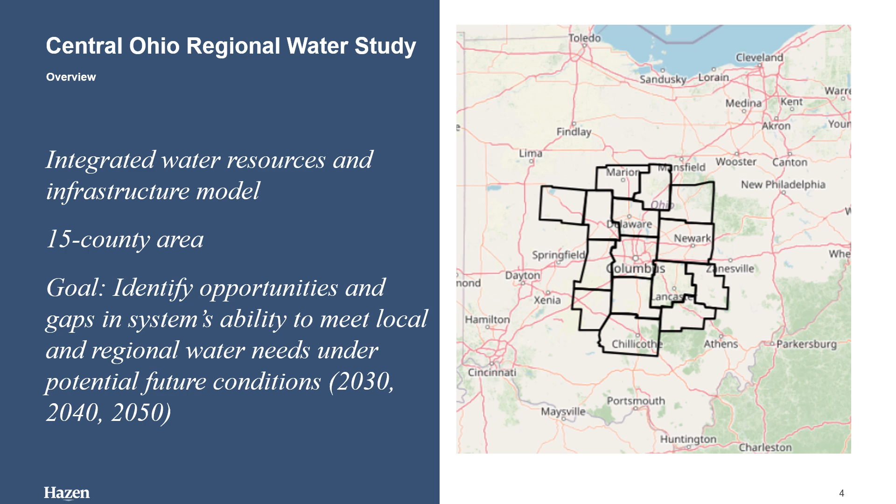Project objectives were identified for the Central Ohio Regional Water Study. The objectives include improve, maintain, and optimize resources while planning for growth.

Results of the model were used to evaluate opportunities to secure safe and reliable water supply for public use, consider reuse water for non-potable needs, and identify areas of capacity limitations. Future solutions were required to maintain beneficial use of water required for recreation, wildlife, and economic growth.

Collaboration and regionalization. The project created a dashboard planning tool that will serve as a focal point for collaboration between utilities and state agencies, helping to ensure best use of both water and financial resources.

Maximize funding impacts through sustainable infrastructure improvements. Using the analytic capabilities in the dashboard, state agencies can now and will in the future be able to help identify funding to build the infrastructure needed to meet the long-term needs for the region and identify future needs.

The project also provides information to the state agencies on how stormwater and surface waters will be impacted by growth and development. The project can be used to identify opportunities to help mitigate impacts of development on the environment.

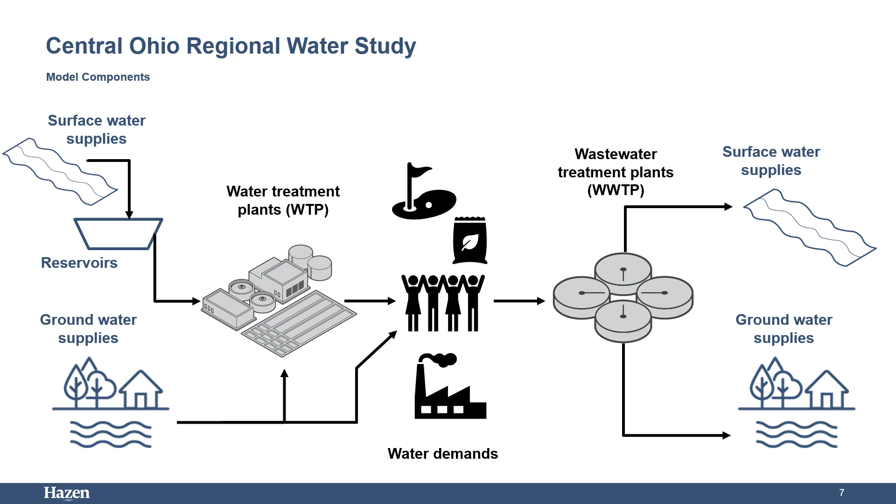Groundwater availability was estimated at the HUC 10 watershed level. HUC stands for Hydrologic Unit Code, and the 10 stands for the number of digits. The U.S. Geological Survey has delineated each of the watersheds in the country and assigned them a specific number based on their location, similar to a zip code.

The system identifies drainage areas into regions, 2 digits, subregions, 4 digits, basins, 6, subbasins, 8, watersheds, which are 10 digits, and subwatersheds, 12 digits.

One daily groundwater availability value was assumed per HUC 10 watershed, and all groundwater users within that HUC 10 were assumed to share that amount of groundwater. Groundwater supplies in Licking County range from 2.5 to 25 million gallons per day for a given HUC 10. Across these watersheds, an estimated total of 59.5 million gallons per day can be sustainably withdrawn from Licking County groundwater sources.

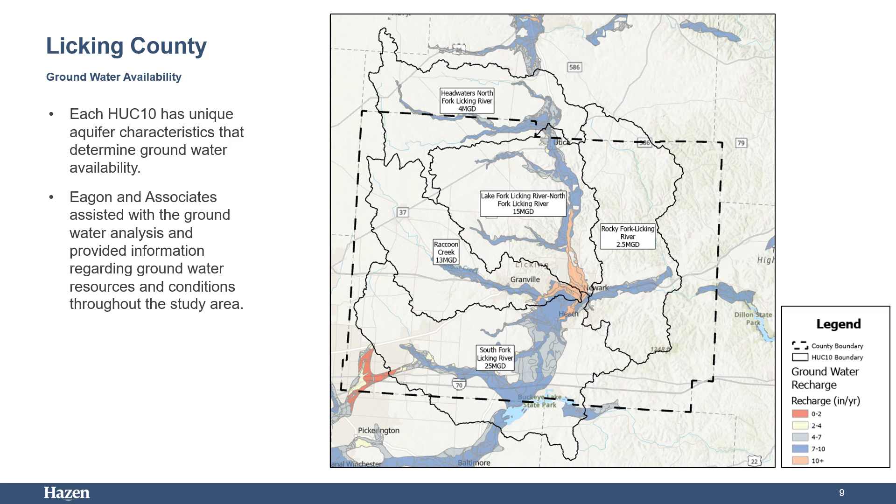Licking County is estimated to have approximately 47.5 million gallons per day of surface water availability. This value is not available at any given stream within the county; however, it corresponds to the most abundant surface water location, on the eastern portion of the county on the Licking River. The western portions of the county have limited surface water availability as they are at the top of the Licking River watershed with less tributary area.

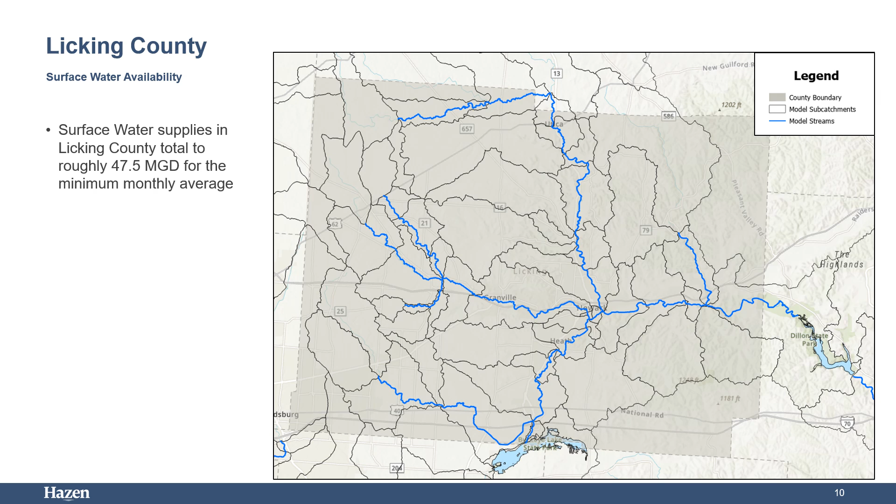It should be noted that the surface water availability estimates are raw runoff estimates. The estimates do not include wastewater flows that are added to the streams. The surface water supply value is the minimum monthly average value for the current condition.

Adding both the groundwater and surface water supplies together, it is estimated that Licking County has roughly 107 million gallons per day of total available raw water supply. This supply availability is nearly split between groundwater and surface water, with slightly more available groundwater.

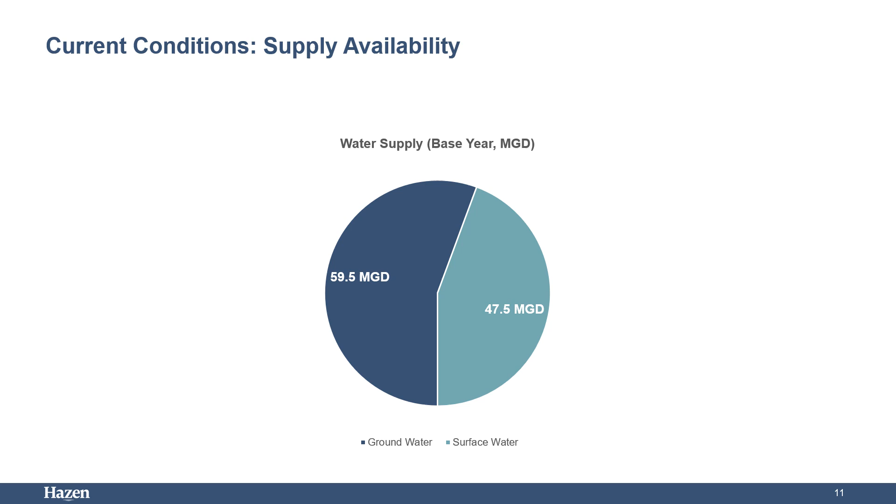Supply availability at the sub-county level varies by location based on aquifer yields and surface water tributary area, as presented on the previous slides. The next focus for this resource evaluation was the existing and future demands that draw raw source water from the available water resources.

Data on water demand was developed using population data, which was available on a regional basis. The information on current county population was obtained from MORPC, the Mid-Ohio Regional Planning Commission. These population data were used to further calculate water demand.

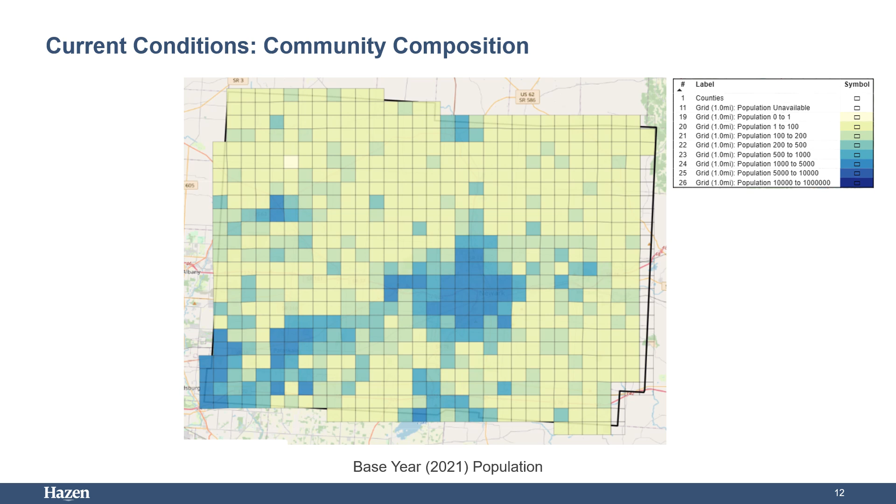Water demands are calculated for each utility using service area boundaries, the population within the service area, and recent historical water production data as reported to the Ohio Environmental Protection Agency.

A per capita water use was calculated for each service area. This was calculated by taking the water production data and dividing by the assumed population within the service area, which resulted in a per capita water use of gallons per person per day.

This per capita water use includes all types of users within the service area, whether it is residential, commercial, or industrial. It is important to note that in future conditions, no service area expansion was assumed, and the water per capita use for each utility was assumed to stay the same. This means that growth in projected population would also mean a proportional growth in commercial and industrial demand within the utility service area boundary.

For future water demands, the per capita water use was multiplied by the assumed future population within a service area.

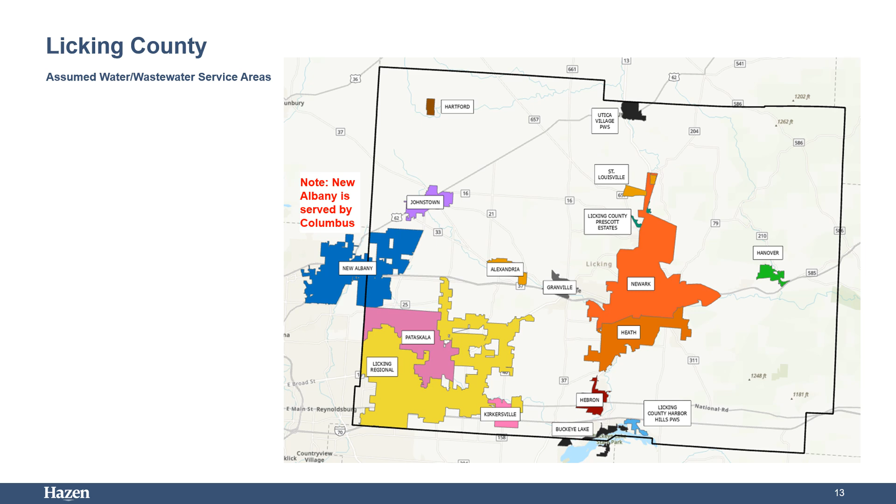The per capita usage assumed for these private water users is 70 gallons per person per day. The total demand estimated from private water systems users is 4.5 million gallons per day. The additional categories shown on the chart represent existing users with water withdrawal permits who report their use annually to the Ohio Department of Natural Resources.

These include residential users such as rural housing developments or mobile home parks, commercial users including retail stores, industrial demands for manufacturing facilities, agriculture draws from large farms, and seasonal users such as golf courses.

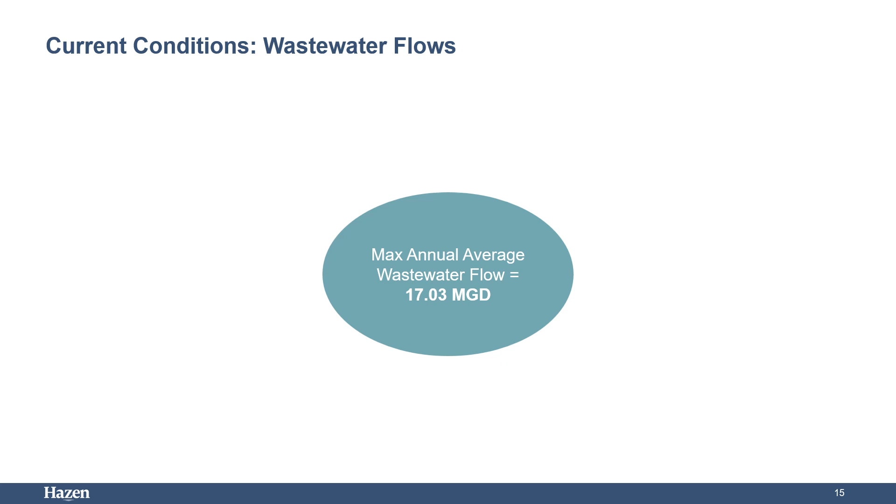This is due to the wet weather impacts observed in wastewater due to the inflow and infiltration impact. During rain conditions, areas with combined sewer systems could see very high flow rates, while during dry times only the base flow is observed. High rainfall in a single month could skew the average. Therefore, an overall annual calculation is used to determine if a particular plant is nearing its permitted treatment capacity limit.

The existing demands and flows can be compared to the existing infrastructure. In Licking County, there are a number of water treatment plant facilities, and their total capacity is just over 30 million gallons per day. Roughly half of that source water is pulled from groundwater, and the other half is pulled from surface water, or the local streams and rivers.

Remember that the total maximum daily water demands are about 22 million gallons per day. So, in the current conditions, the county has sufficient capacity to provide treated water to meet demands.

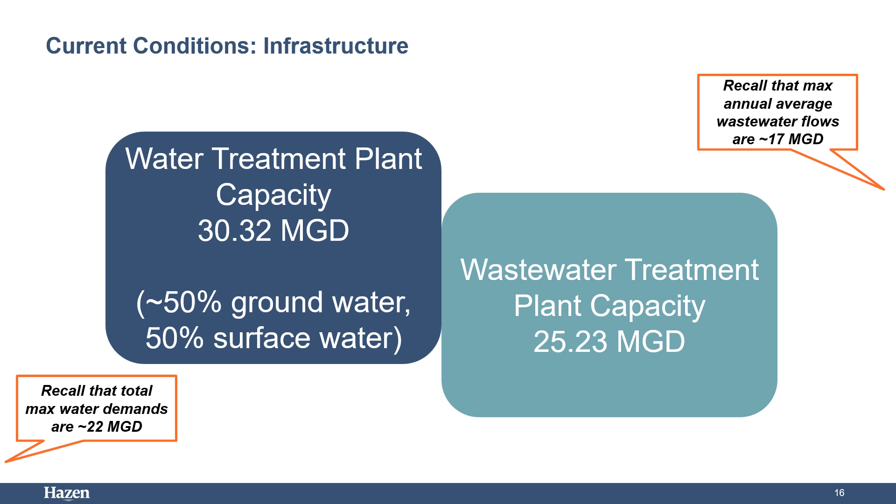From a wastewater treatment plant capacity standpoint, the county has just over 25 million gallons per day of permitted capacity at the existing facilities across the county. The current maximum annual average wastewater flows generated by the demand and inflow and infiltration are about 17 million gallons per day. Again, the existing county infrastructure is sufficient to meet the current wastewater flows.

With an understanding of the current conditions in the county, the next step was to expand the analysis and explore potential future conditions. This study evaluated conditions in 2030, 2040, and 2050.

When analyzing future conditions, current data is projected from the present to the future in time. With that projection comes uncertainty, which is why analyzing multiple potential future scenarios can provide more resiliency and reduce the risk of failure.

Analyzing several scenarios or plausible futures helps ready the region for ending up in future A, B, or C, and knowing the projects to implement all along the way.

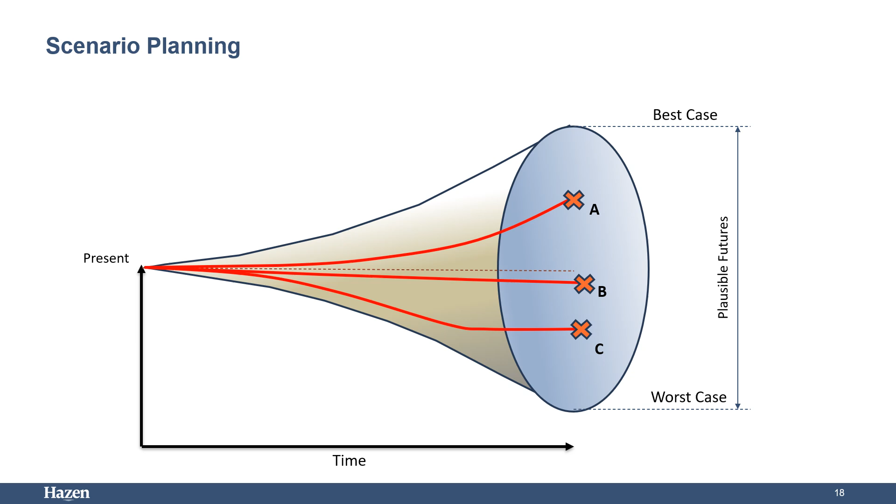4 model scenarios were developed to define the range of potential futures. Scenario conditions that were explored were 2 different precipitation and temperature changes and 2 different population estimates, totaling 4 different model scenarios. The different inputs of these scenarios will be explored further on the following slides.

2 population sources were used for the scenario modeling. The expected growth trend was informed by the Mid-Ohio Regional Planning Commission, or MORPC. The MORPC population projections were informed by local zoning and land use plans. The historical growth trend was informed by the Ohio Department of Development, or ODOD. The ODOD populations are informed by historical birth, death, and migration trends.

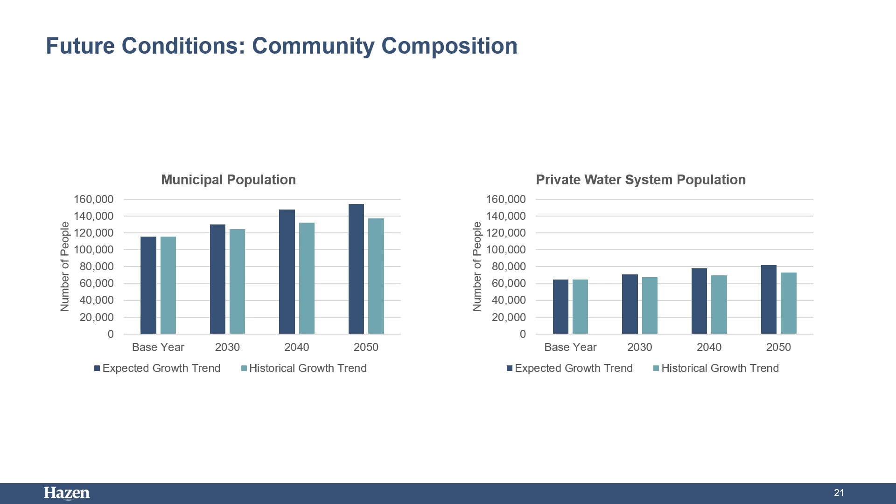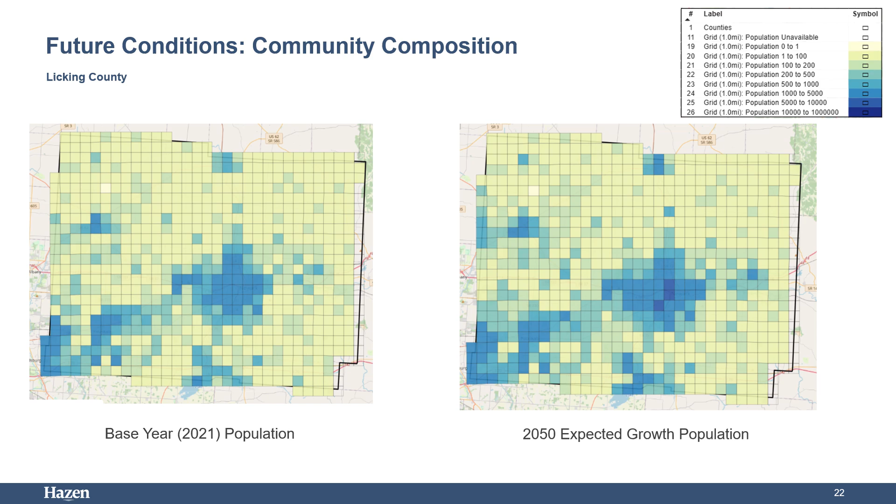Another element of the scenario modeling is the different temperature and precipitation scenarios projected. Historical precipitation and temperature data from 1983 through 2022 were used to estimate surface water runoff and evaporation. For future conditions, change factors were applied to the historical data to analyze the effects on surface water availability.

Temperature and precipitation changes were based on global climate model data downscaled to the Central Ohio area. There are different change factors for each month and future planning year—2030, 2040, and 2050. Change factors were extracted from an ensemble of 49 global climate models from the Intergovernmental Panel on Climate Change.

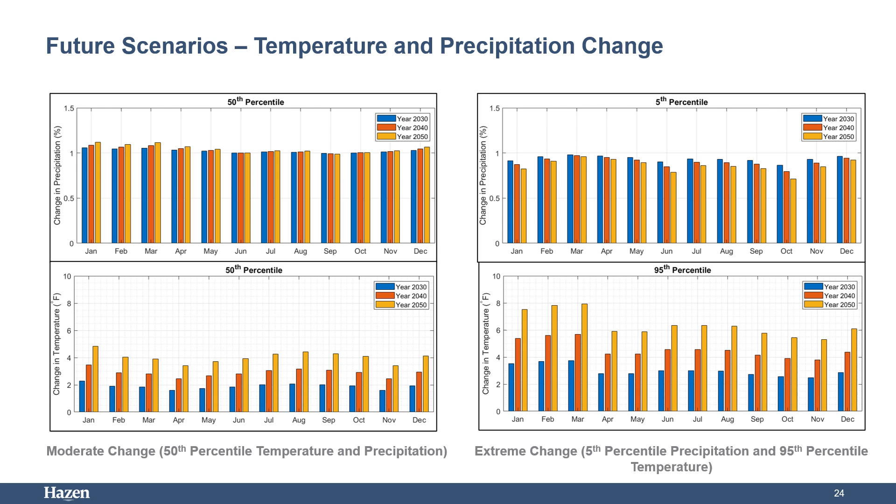The extreme change scenario modeled is the hot and dry scenario, which utilizes the 5th percentile change factor for precipitation and the 95th percentile change factor for temperature. The top right graph shows the 5th percentile change factors for precipitation, and the bottom right graph shows the 95th percentile change factors for temperature. A scenario with no future temperature and precipitation change factors was also evaluated.

The two temperature and precipitation conditions affect the future raw water supply availability, as the two different population estimates affect the future water demands.

These four scenarios allow for planning of what different supply and demand conditions may look like and how those conditions compare to the infrastructure needed.

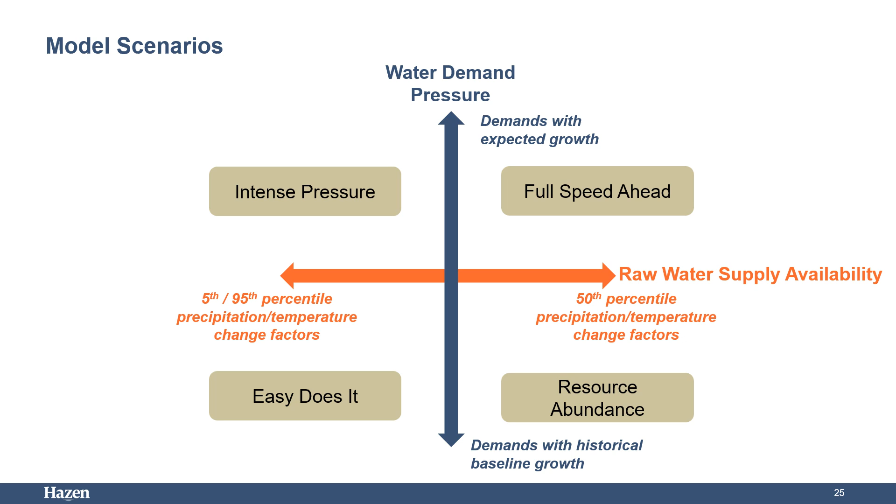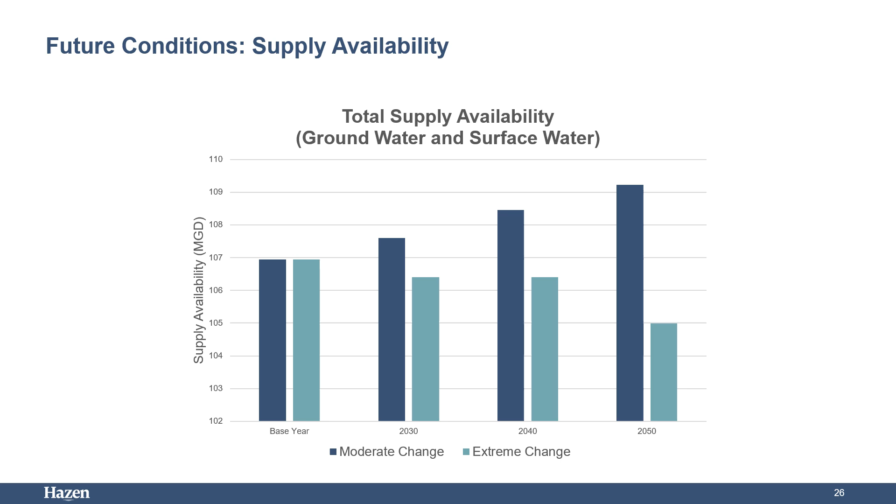The Ohio State University was consulted about assumed increases in future agricultural irrigation water demands. It is estimated that by 2040, agriculture fields will need at least 5 inches of irrigated water during the critical growing season, which occurs between July and September. Based upon this information, the team reviewed future land use to identify where agricultural fields are expected to be in 2040 and 2050, and calculated the water demand needed for 5 inches of irrigation across those agricultural fields. These irrigation demands are present for the 2040 and 2050 condition and are assumed to use groundwater for source water.

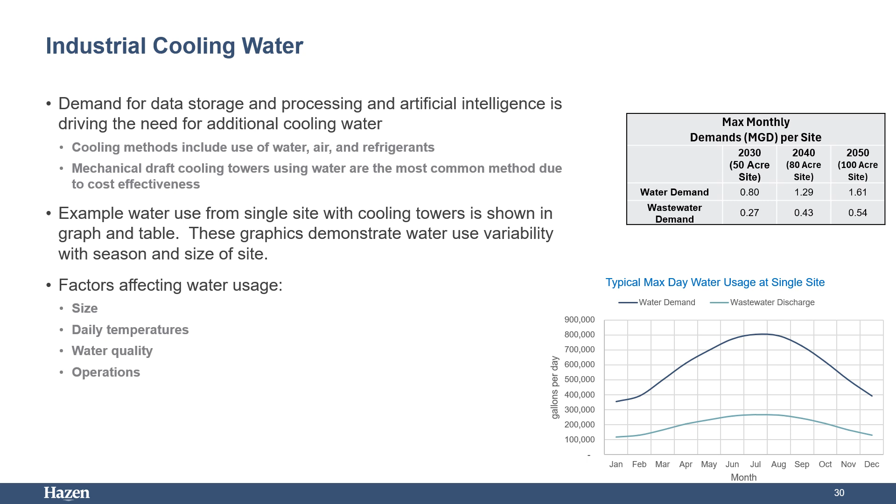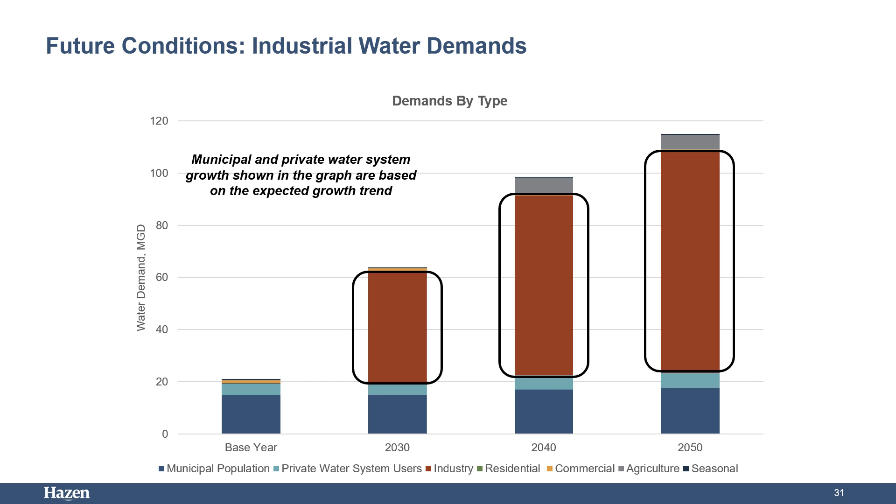Based on the assumptions described on the previous slide, industrial demands are assumed to increase over time and become a large portion of the assumed future water demands in the county, as shown in the circled dark red bars.

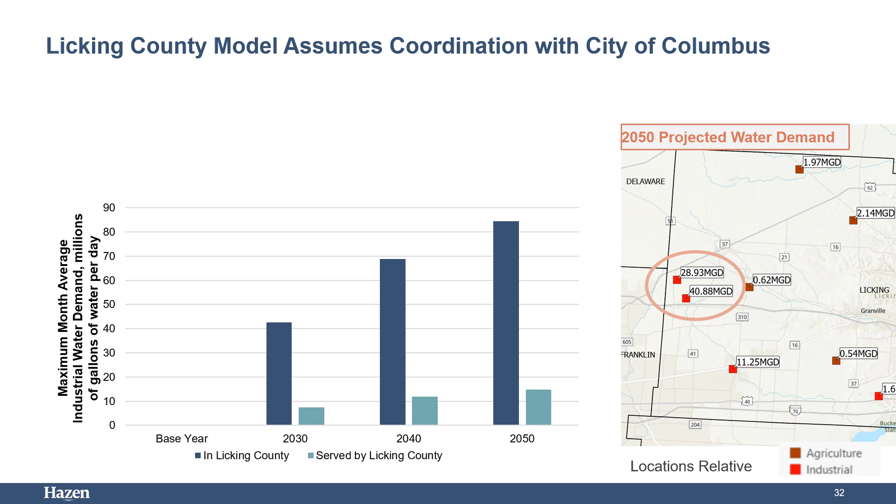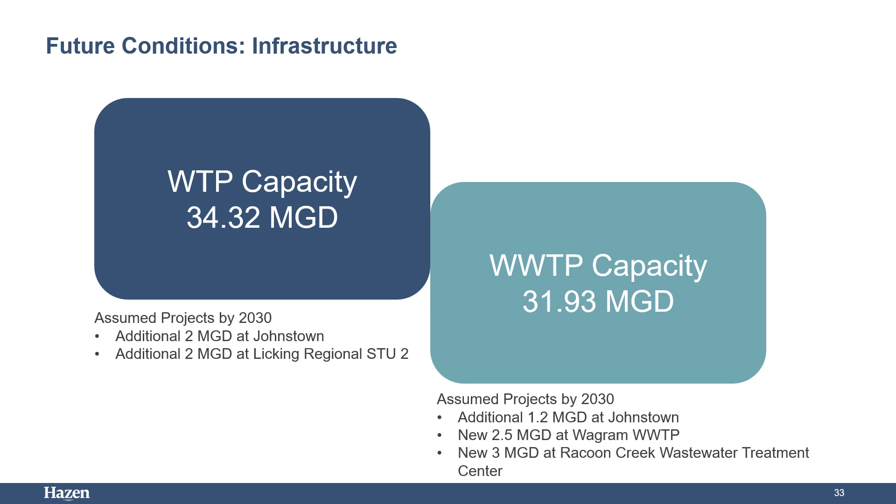In this section, we will discuss water resource and related infrastructure needs at the county level.

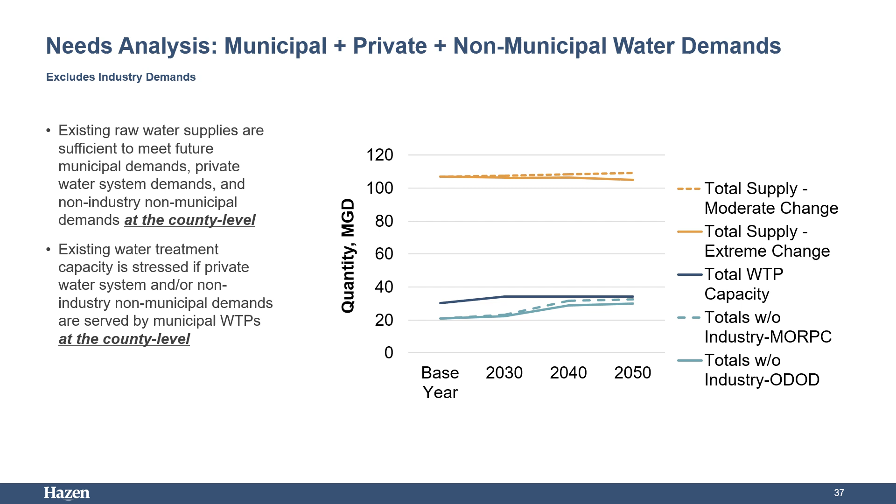Regional partnerships or raw source water from outside the county will be needed to serve all the assumed industrial demands within the county.

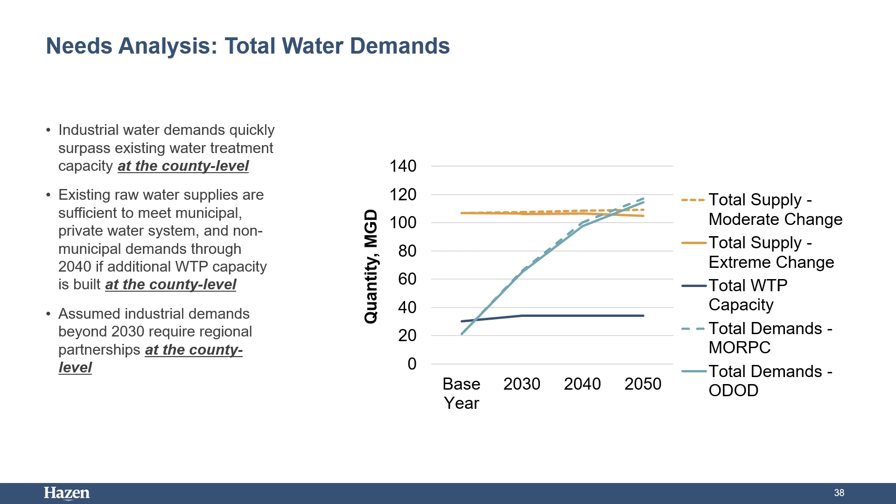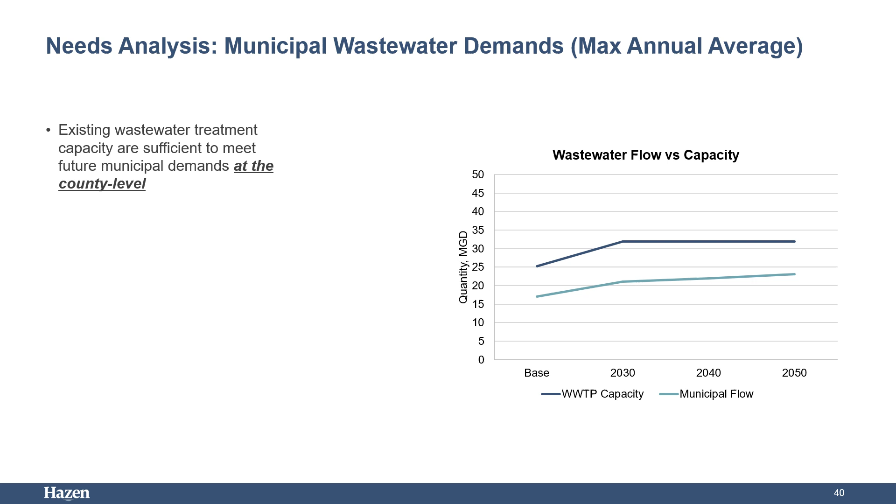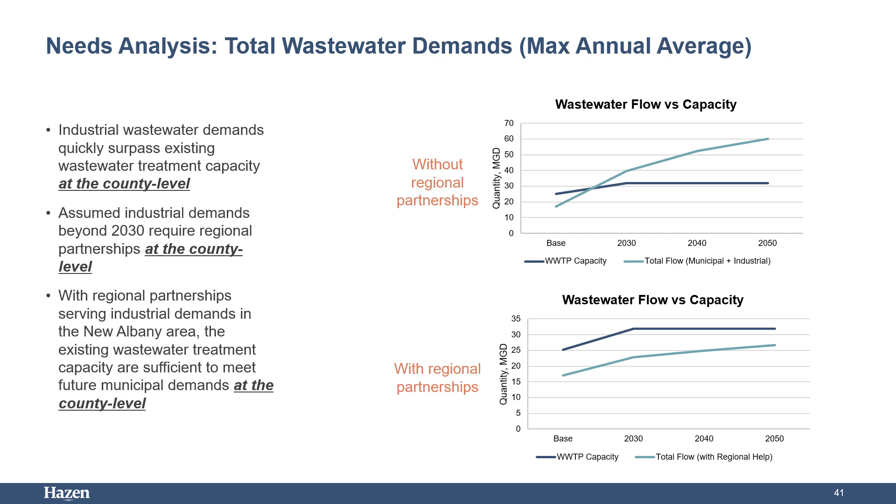The previous section evaluated supply and infrastructure availability relative to demands at the county level. This following section will address resource gaps and abundances when you consider where those supplies, infrastructure, and demands are projected to occur within the county.

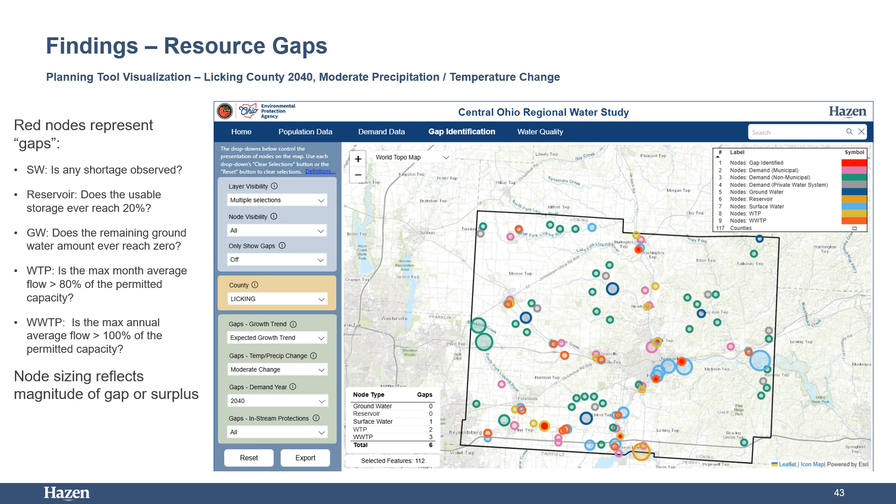Findings in the subsequent slides reflect the expected growth and moderate temperature and precipitation change in 2040. The 2040 full speed ahead scenario was selected as the target planning scenario to allow stakeholders to assess the current and future project needs without extending too far into the future while using reasonable temperature and precipitation projections.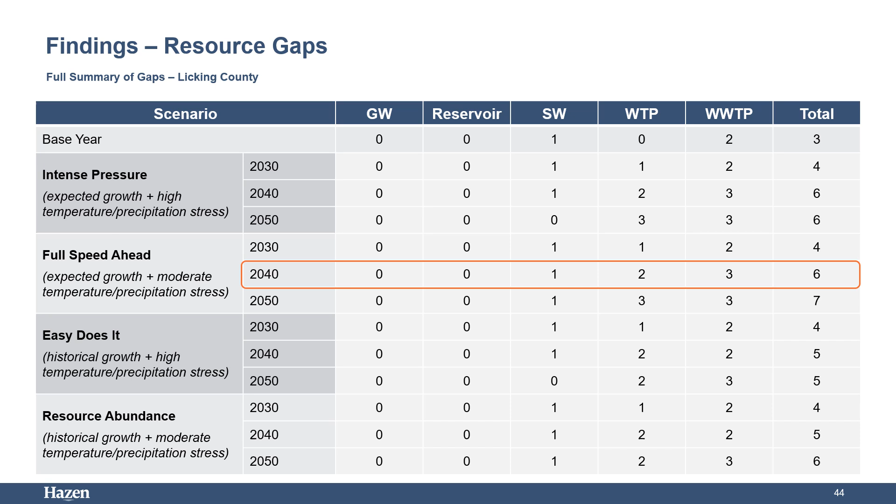The following slides will provide detailed discussion of the potential projects that could fill identified water resource and infrastructure gaps within Licking County. Project focused on identification of opportunities and strategies to fill those resource or infrastructure gaps. Gaps can be filled through a variety of ways depending on the type of gap.

For example, a supply gap could be filled by constructing a reservoir or implementing a policy to restrict use during times of low supply availability. Other solutions include expanding treatment capacity and leveraging reuse water. Gaps are often filled with a project or a set of projects.

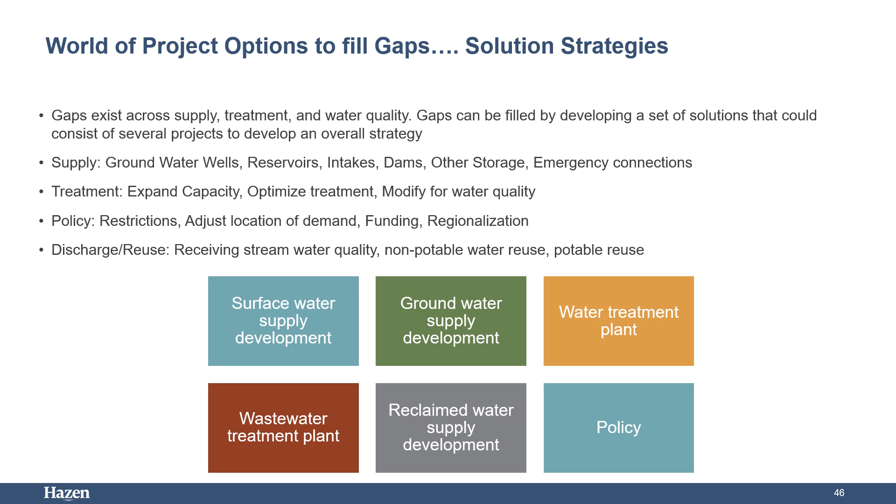A gap or set of gaps can be filled a variety of ways and can exist across some or all scenarios. A scenario scorecard was developed to assess the favorability of a project used to fill a gap. 5 scorecard criteria were developed to evaluate projects compared to each other as indicated on this slide.

Scenario applicability assesses if that project will fill a gap across one or more scenarios. The more scenarios it addresses, the better. Similarly, but a little different, within the same scenario, a project that fills more gaps is more favorable. Life cycle costs are another important consideration. The total life cycle costs include construction, operation and maintenance, and other projected costs.

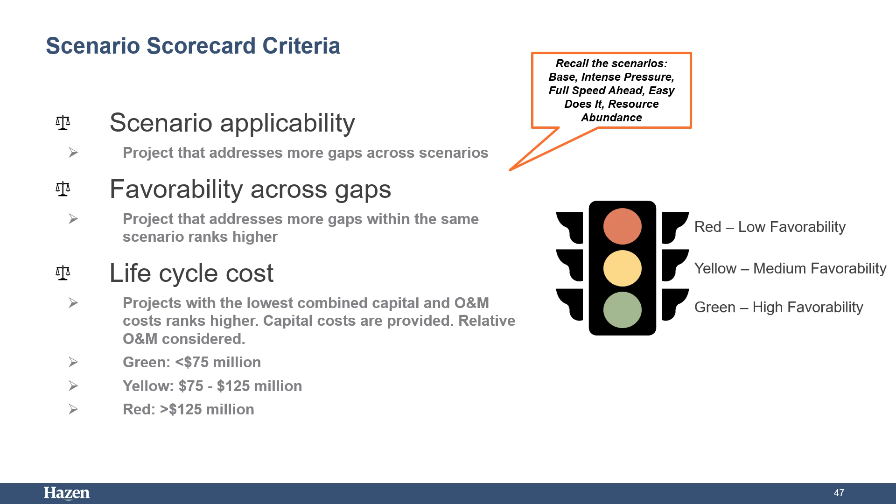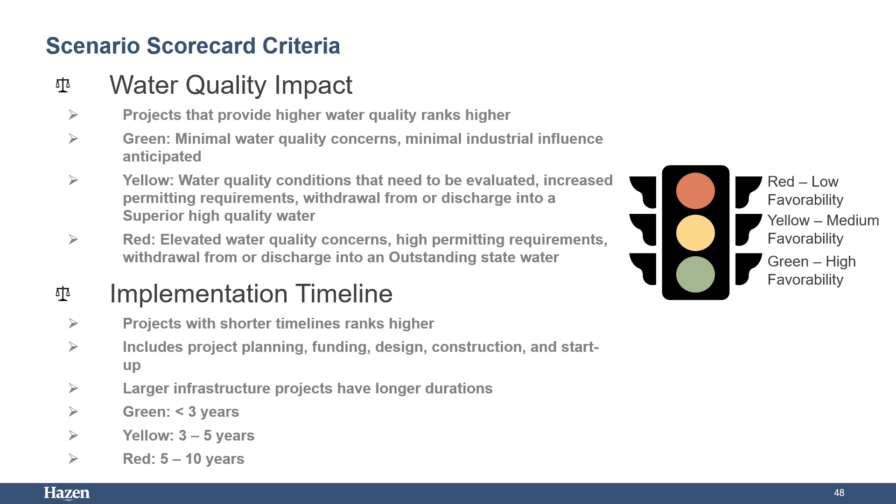Water quality impact considers impacts associated with development, as well as changing water and wastewater use. A project that provides higher protections to water quality ranks higher. Finally, a project with a shorter implementation time would be considered more favorable since the benefits of that project would be realized sooner.

Strategies for the 2040 full speed ahead scenario provide planners with near-term planning information. Note that findings of the resource gaps were previously discussed and can be further explored using the dashboard planning tool. The infrastructure gaps, treatment gaps, and supply gaps are shown in the map graphic. Many of the gaps are relatively small, so monitoring flows in the near term may be sufficient.

Pre-planning level projects are provided as examples and possible solutions to fill gaps. Additional efforts are needed to define, plan, and implement a project as outlined in the next steps.

Projects to fill gaps are categorized by type. First is local, where the utility largely uses its own assets to fill a gap, or an industry provides its own on-site solution. Next is regional, where a utility collaborates with other utilities. And reuse, where the utility leverages reuse water to provide non-potable water to an industrial user in order to reduce potable water demand.

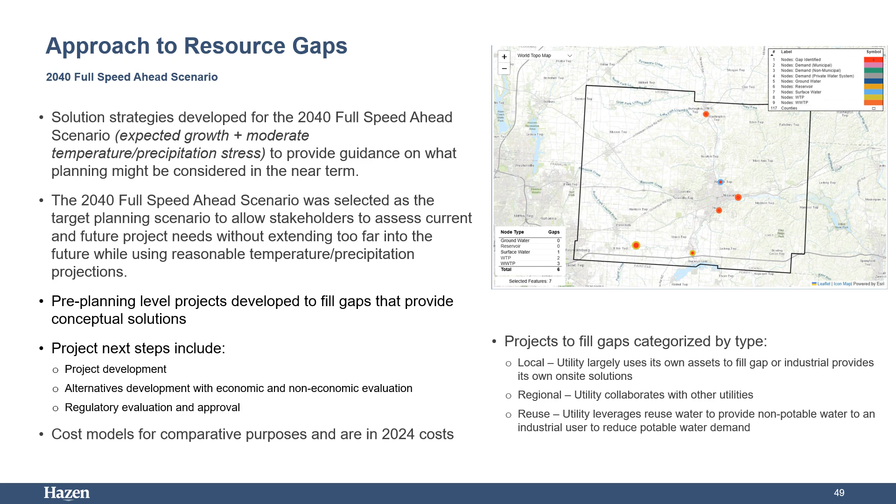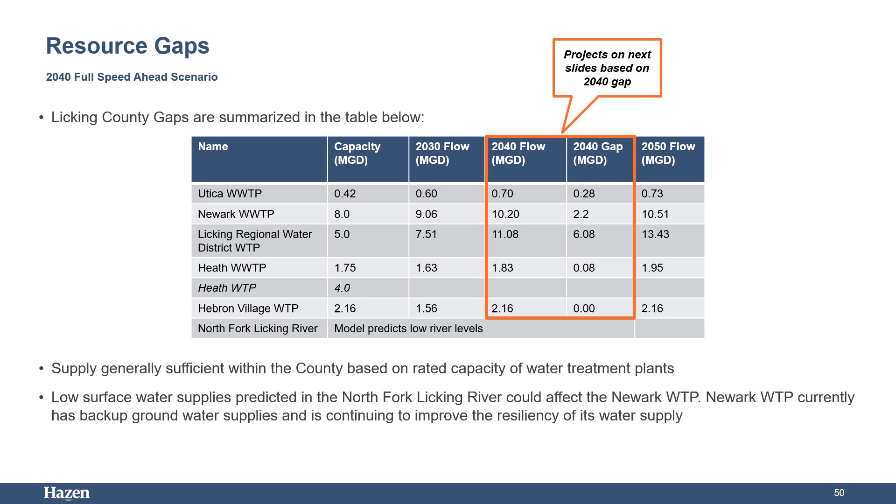The limited surface water supply predicted in the North Fork Licking River could affect the Newark Water Treatment Plant. It should be noted that Newark Water Treatment Plant currently has backup groundwater supplies and continues to improve the resiliency of its water supply system.

The Utica Wastewater Treatment Plant has a projected wastewater treatment plant gap of 0.28 million gallons per day. The timing and right sizing of the expansion of the wastewater treatment plant should be aligned with the village's priorities.

Two general options were developed to provide an additional 1 million gallon per day of capacity as needed for future growth. Those options were a local upgrade and a regional connection.

The expansion of the existing Utica wastewater treatment plant assumes construction of new treatment facilities with no use of existing facilities. The village may be able to combine the expansion with use of existing facilities to reduce infrastructure requirements.

A regional interconnection with the city of Newark could be a viable long-term option. There are many considerations beyond just the infrastructure costs shown, including needed improvements at the Newark wastewater treatment plant. But regionalization and collaboration offers new opportunities to maximize resources.

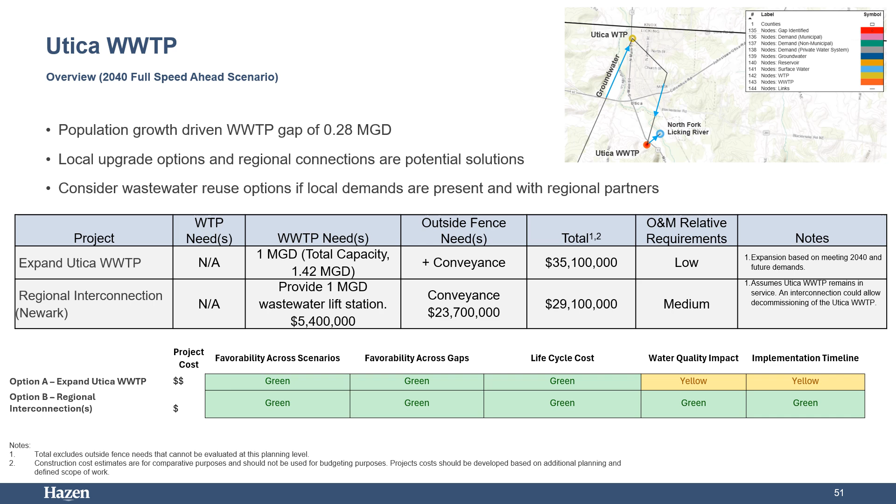The project options described as A and B were evaluated using the project scorecard, with green cells indicating options with highest favorability.

The Newark wastewater treatment plant has a projected wastewater treatment plant gap of 2.2 million gallons per day. The city has numerous inflow and infiltration reduction projects in progress and is currently completing a wastewater treatment master plan.

An option to address this projected gap is a 6 million gallon per day plant expansion of the Newark wastewater treatment plant, for a total permitted capacity of 14 million gallons per day. Regional connections were evaluated and not found to be cost effective. Non-potable industrial reuse options could be considered for the beneficial use of treated effluent from the Newark wastewater treatment plant.

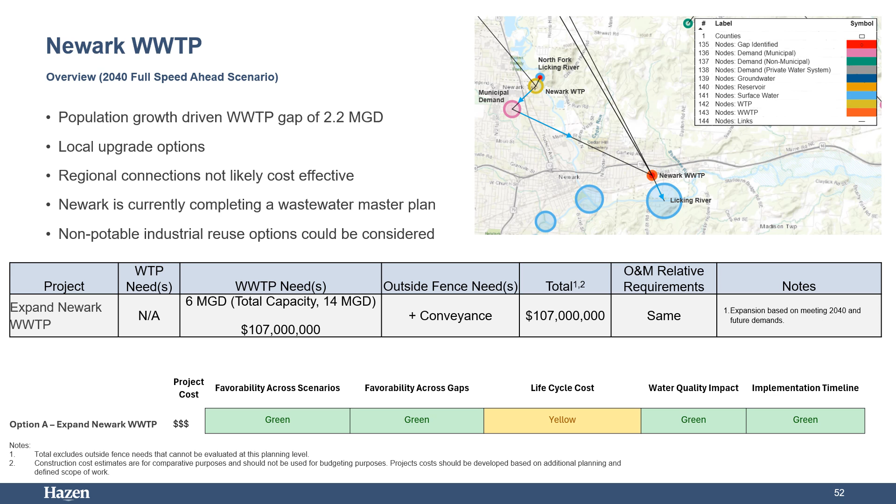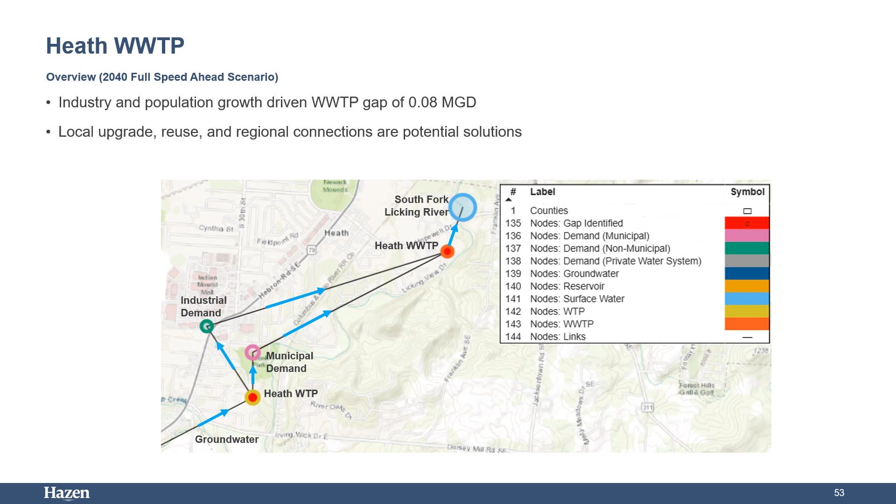Two options were created to provide an additional 0.5 MGD of capacity to address the 2040 gap. These options were evaluated using the project scorecard, with green cells indicating options with highest favorability. A third option was also evaluated to address the 2050 gap, when the water treatment plant shows a predicted gap.

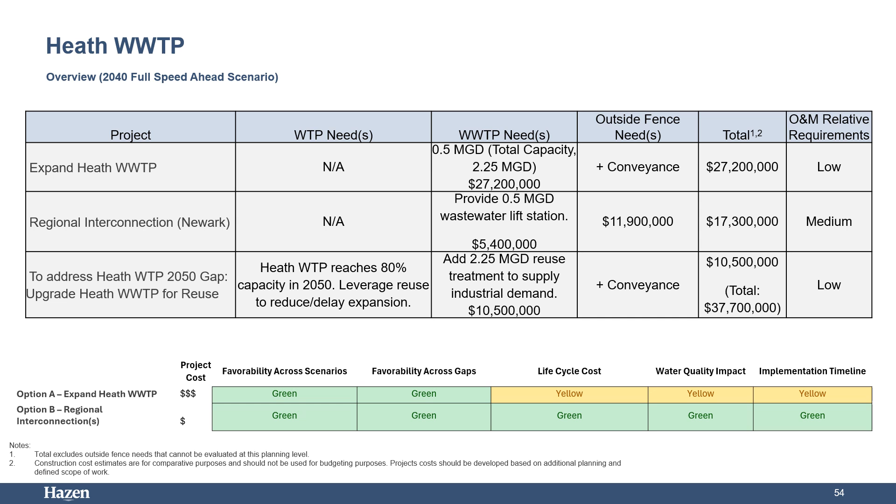This option includes reuse treatment technology added to the expanded wastewater treatment plant. The wastewater treatment plant effluent would be used for non-potable industrial reuse, which would reduce reliance on potable water and may delay expansion at the water treatment plant. Note that the total cost for the reuse option includes the required expansion at the Heath wastewater treatment plant.

The Hebron water treatment plant has an identified water treatment plant gap, as they will be nearing capacity in 2040. Timing, right sizing, and expansion of the water treatment plant should be aligned with the village's priorities.

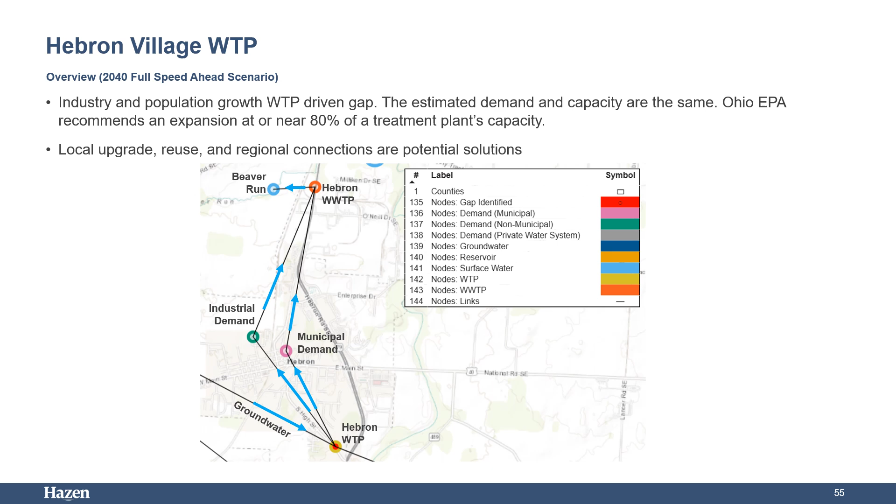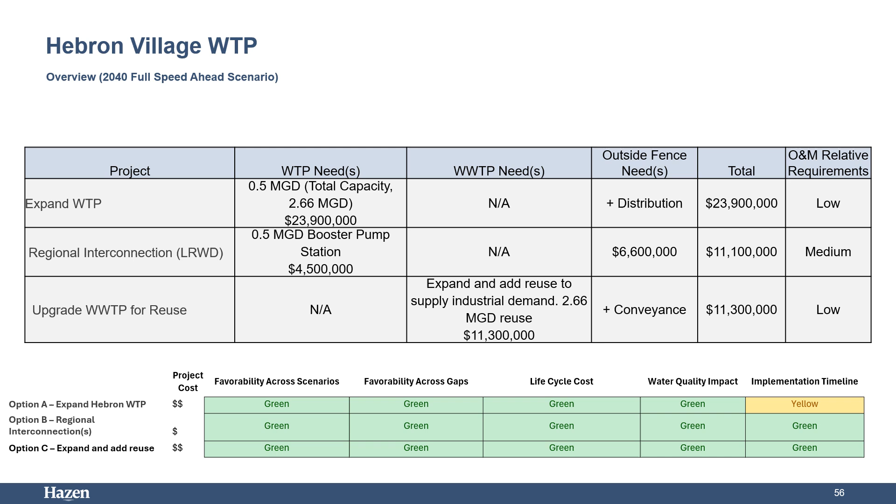Options were evaluated to provide an additional 0.5 MGD of capacity: local improvement, regional interconnection, and adding reuse treatment technology to the expanded wastewater treatment plant. If reuse technology is employed, the wastewater treatment plant effluent could be used for non-potable industrial cooling, thereby reducing reliance on potable water. The project options described as A through C were evaluated using the project scorecard, with green cells indicating options with highest favorability.

The North Fork Licking River was projected to be a resource gap by the model. This river is the source water for the Newark water treatment plant. The model predicted that during some conditions, river levels would drop to low levels that would require the city of Newark to use alternative water supplies.

The city maintains existing groundwater wells for backup and continues to improve the resiliency of its system. The recently completed source water capacity study looked at additional future source options, including new or expanded wells and an up-ground off-stream reservoir.

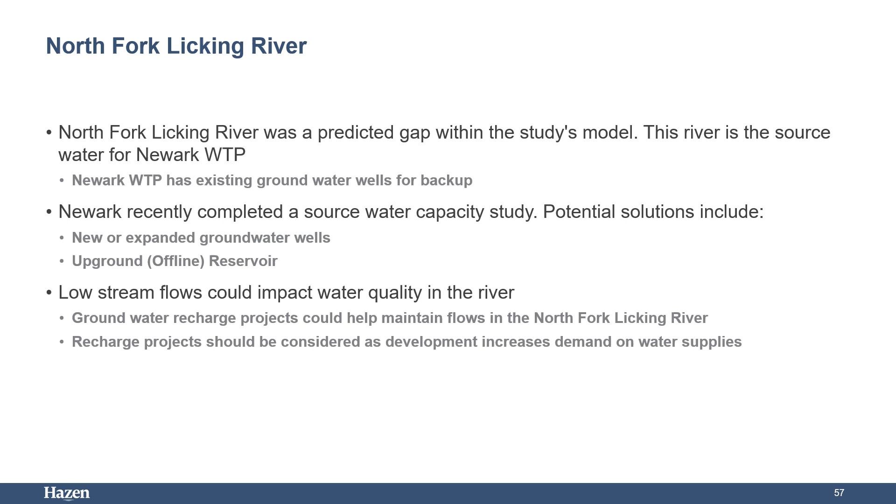Low stream flows could also impact future water quality and aquatic life. There are opportunities to mitigate the water quality impacts, including projects such as groundwater recharge to help maintain flows in the river. Recharge projects should be considered as development increases demand on water supplies.

Licking Regional Water District is expected to see increased flow from residential and industrial growth. As indicated in the table, water supply will be generally sufficient to meet municipal demands. The relatively large projected industrial water demand of 9 million gallons per day will exceed Licking Regional Water District's water treatment plant rated capacity of 5 million gallons per day.

The combined municipal and industrial demand will create a gap of 6.2 million gallons per day. The return wastewater flow from the industrial users is projected to be 3 million gallons per day, which should be significant for one of the district's wastewater treatment plants.

However, Licking Regional Water District has 3 wastewater treatment plants and could distribute the flows among the plants as needed. Consequently, no gap relative to wastewater treatment is expected, as shown in Table 2.

Planning level projects were developed to fill the water treatment plant gap. Projects were categorized by local, regional, and reuse, as previously discussed.

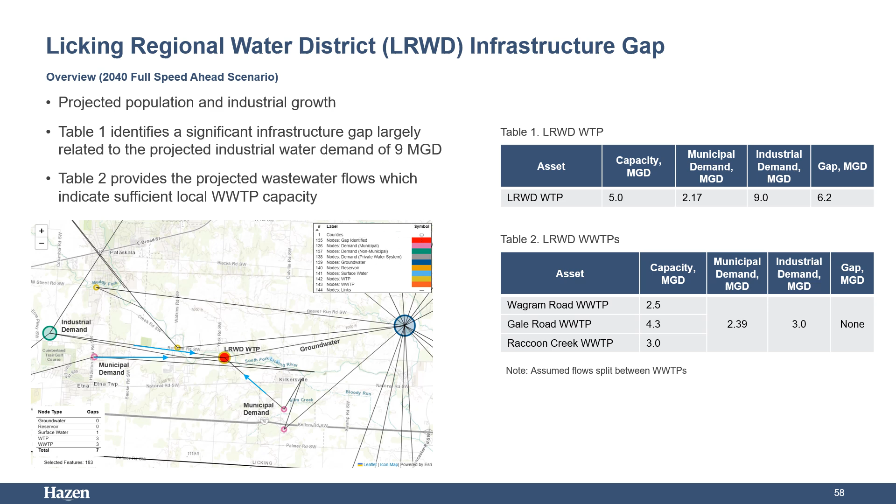2 local project examples are indicated on this slide. Note that there are potentially more options which may arise if alternative future scenarios are considered. Option A is for Licking Regional Water District to construct a new membrane water treatment plant sized to meet the gap, plus additional capacity to provide for future users.

The total cost is about $87 million. Note the groundwater supply for this area indicates available supply for this option. However, site-specific restrictions may apply.

Option B is for the industrial user to provide its own water and wastewater treatment. Industrial users often do not require the same level of treatment as potable water, creating an opportunity for reduced treatment costs. Similarly, wastewater treatment plants for the expected type of industrial user tends to have lower treatment costs.

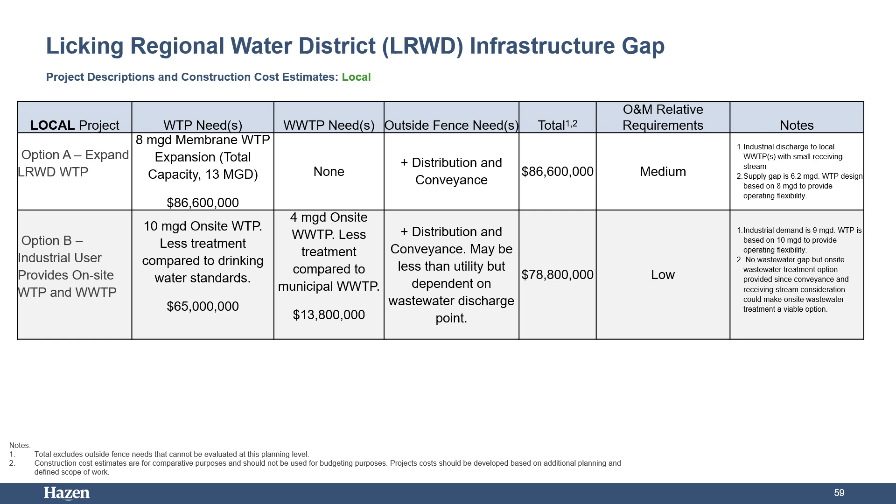One straightforward regional project could be an interconnection to another utility that has available capacity. Another potential opportunity could be construction of a regional facility.

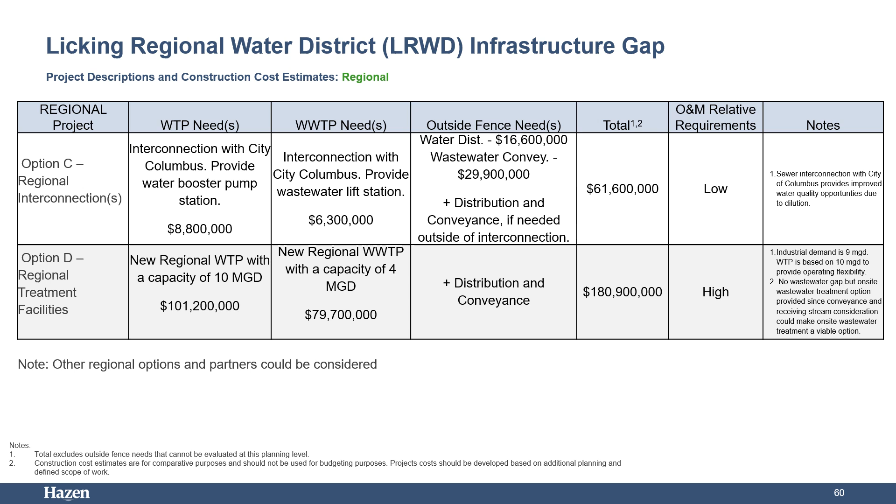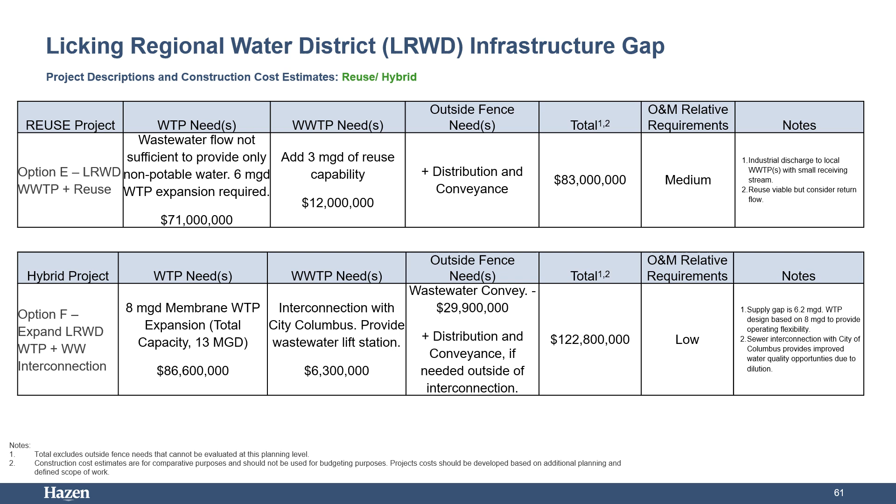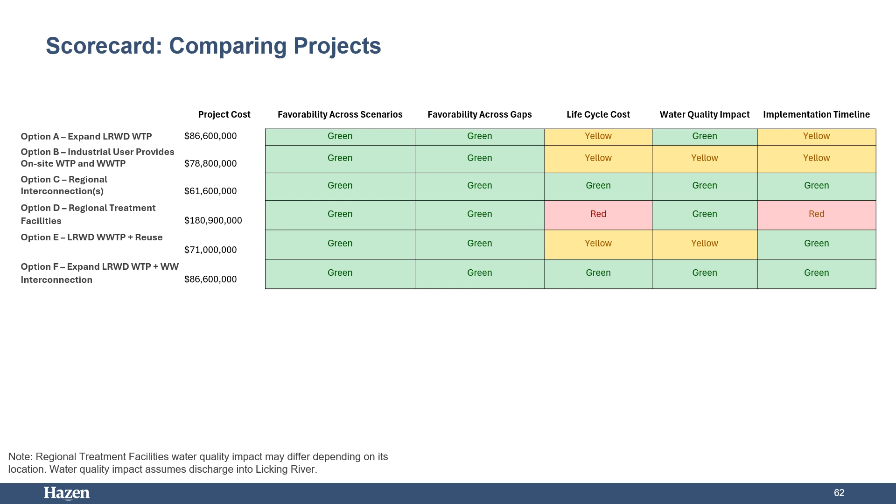Projects described as A through F were then evaluated using the project scorecard, with green cells indicating options with highest favorability.

Ohio is facing aging environmental infrastructure, rising construction costs, increased focus on asset management, strained local budgets for operations and maintenance, and increasing water and wastewater user charges for residential customers. These factors require communities to evaluate the affordability and sustainability of their water and wastewater systems, especially if there are opportunities for sharing services, interconnecting utilities, and even full regionalization.

Regionalization is a spectrum of collaborative activities ranging from informal to formal partnerships between communities in the same geographic area. There are 7 planned or required wastewater treatment plant expansion projects in Licking County. The total additional needed capacity is 14.45 million gallons per day, driven by municipal and industrial demand. Regional opportunities, such as a regional wastewater treatment plant or other partnerships, could be a viable alternative.

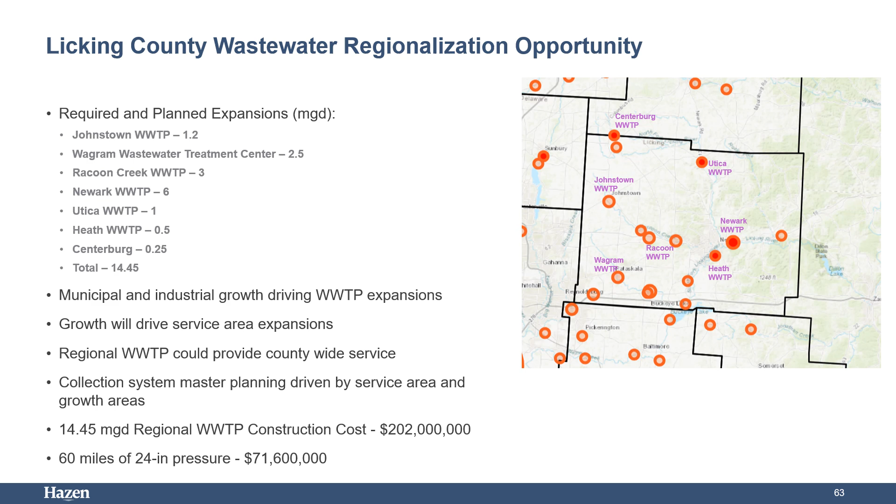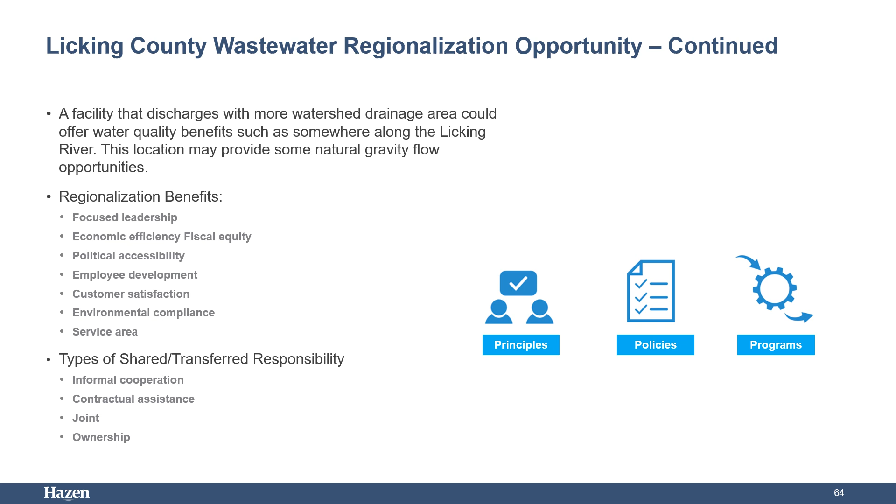Siting a regional facility is based on service areas, available land, proximity to discharge points, and other factors. Discharging to the Licking River could offer water quality benefits. Regionalization benefits and types of responsibility are shown for reference as an aid in discussion and evaluation.

This next section will present the evaluation conducted to determine areas of opportunity, which are defined as areas where there is assumed modeled surplus capacity. It should be noted that this section only identifies potential areas for opportunity. Project planning and utilization of surplus capacities will require further evaluation and discussions with local municipalities and stakeholders.

First, water supply areas of opportunity will be discussed. Raw water supply sources in the county have opportunity for growth. Buckeye Lake could be considered as a potential raw water source. There is surface water opportunity on the eastern portion of the county, specifically in the Licking River, downstream of the Newark wastewater treatment plant discharge. There is less groundwater opportunity than surface water, but there is still some available groundwater opportunity throughout the county.

Next, we looked at the areas of opportunity or surplus resource with regards to water and wastewater infrastructure. Though there are several infrastructure gaps within the county, there are also areas of opportunity. Johnstown is currently working to upgrade their water and wastewater treatment plants. Newark has remaining water treatment plant capacity, though source water for the water treatment plant will need to be assessed. Licking Regional is currently constructing several new wastewater treatment plants, providing some wastewater treatment opportunities.

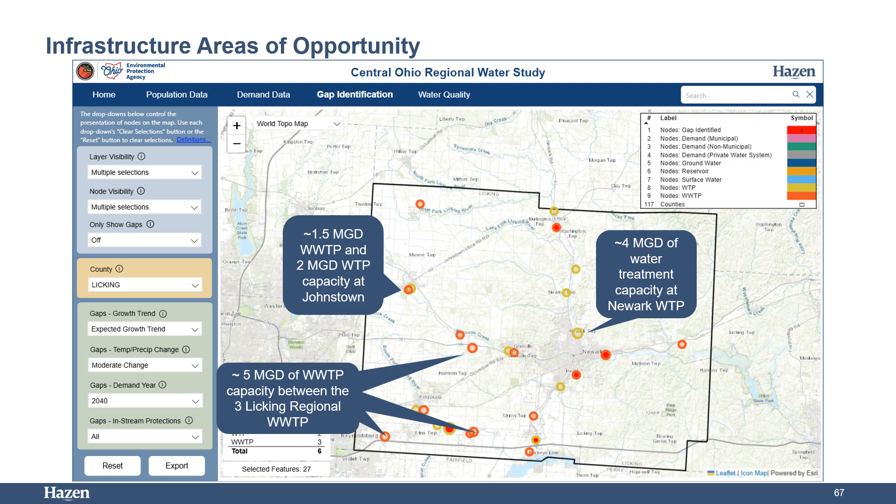This next section will present the project findings relative to projected water quality across the planning horizon. While the Central Ohio Regional Water Study was primarily focused on water supply and treatment capacity, the models developed were also used to project potential impacts to water quality that may occur due to changes in population, land use, infrastructure, and future temperature and precipitation changes.

The goals for the water quality assessment were to characterize existing water quality conditions. The study identified watersheds with the highest existing water quality. Such pristine watersheds were considered to be the most sensitive to future development. Determine potential impacts: the study developed potential impact factors based on available data and the suite of possible future scenarios, including those evaluated for water supply and treatment. Watersheds were characterized as having higher or lower potential for impacts based on the identified impact factors.

The scenarios use a range of future conditions. The intent is to illustrate where water quality impacts will likely occur, and finally, to provide recommendations and activities that could be completed by local agencies, utilities, and organizations to help offset, mitigate, and protect against water quality degradation.

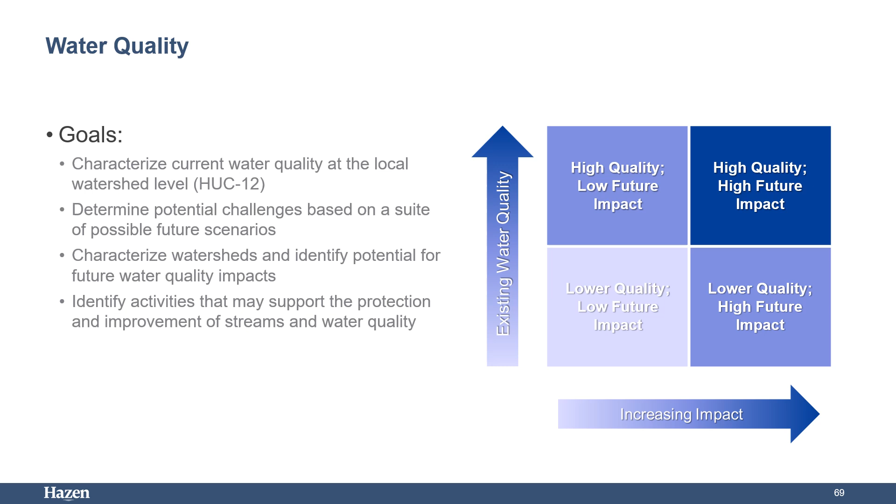Watersheds throughout the region were characterized using three metrics. First, quality of aquatic habitat.

This is a standardized metric for measuring the quality of aquatic habitat at a specific location within a stream. The average QHEI score in a watershed was calculated to determine the overall aquatic habitat score.

Second, targeted water quality standards. The aquatic life use designation, as well as anti-degradation tiers, provide a listing of streams that are targeted to remain high quality. These are assigned by stream reach for each watershed.

And stream biological health. The Ohio EPA has performed modeling to estimate the potential biological health of headwater streams based on land use factors and a desktop analysis. This modeling generated an estimate for all of the headwater streams in each watershed. A summary categorization of the results was applied to each watershed based on all of the stream reaches within its boundary.

Given the above factors, an overall water quality category was applied to each HUC 12 watershed, ranging from poor to excellent. For Licking County, the majority of the watersheds scored as good or excellent, with a few small exceptions.

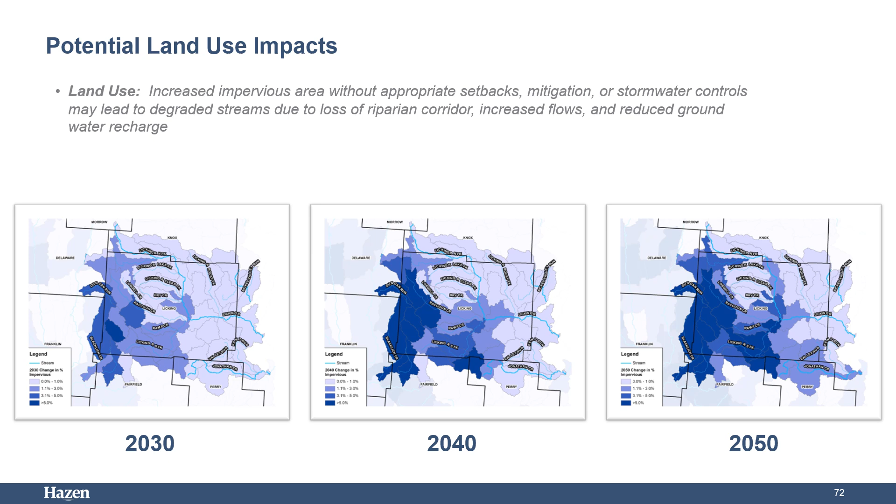Hydromodification impacts: when streams see higher flows and/or more frequently occurring storm events, stream banks may experience increased erosion. With these flow changes, streams may become incised and disconnected from floodplains, resulting in a decrease in water quality and increase in suspended solids. A stream model was developed for the entire 15-county service area to simulate stream flow from runoff as well as from wastewater treatment plant infrastructure.

Future scenarios were developed that examined the impact of changes in population, land use, and temperature and precipitation on projected flows. 40 years of simulated stream flow were analyzed to determine the impact of different future scenarios on projected flows. Flows from the model were used to determine which watersheds may have a higher potential for channel modifications due to changes in flows.

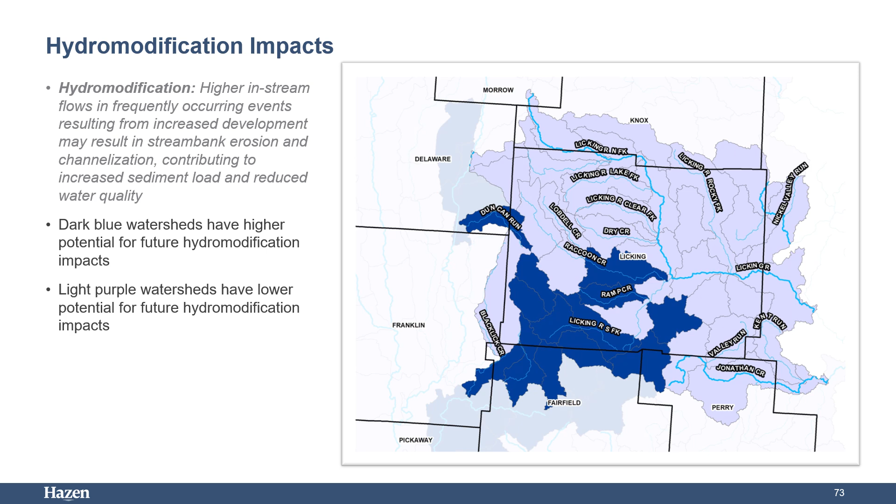Watersheds in dark blue have higher potential for future hydromodification impacts based on the regional watershed model. For watersheds with a downstream modeled link, any of the watersheds that saw a 10% or higher increase in projected flows during frequently occurring storm events were designated as having a higher potential for hydromodification to occur. The watersheds with a lower potential may still experience hydromodification in isolated instances, but changes are not projected to be as significant given the range of forecasted scenarios.

Increased occurrence of low flows. During dry weather conditions, healthy streams may typically maintain base flows to support aquatic life. If these low flow periods are extended or flows are projected to be even lower, it may have a negative impact on water quality and lead to more restrictive permitting requirements.

The stream model was used to simulate stream flow from runoff as well as from wastewater treatment plant infrastructure. Future scenarios were developed that examined the impact of changes in population, land use, and temperature and precipitation on projected flows. 40 years of simulated stream flow was analyzed to determine the impact of different scenarios on projected flows. Flows from the model were examined, and an evaluation of flows during the driest periods was conducted to determine which watersheds may have a higher potential for water quality impacts due to decreased base flows during drier periods.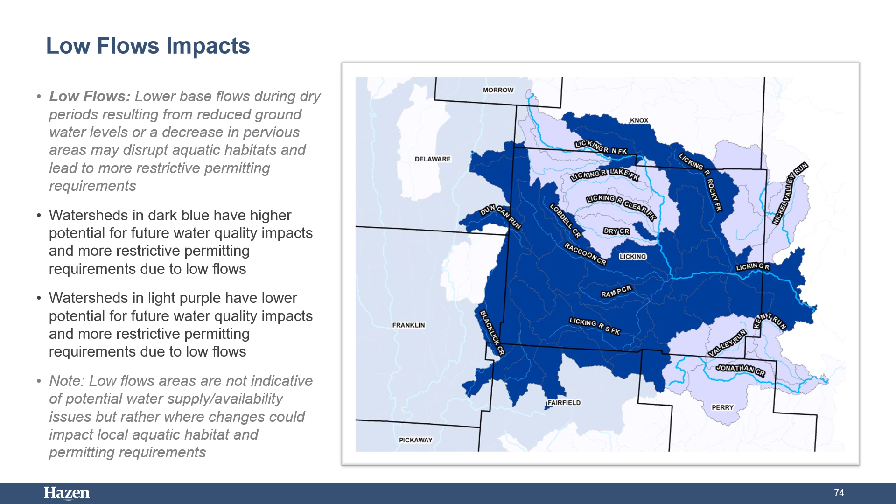The watersheds with a lower potential for low flow impacts may still experience impacts due to drier conditions in isolated instances, but changes are not projected to be as significant or as widespread given the modeled results from the range of forecasted scenarios. As noted, these areas are not indicative of any potential water supply or availability concerns, but instead indicate areas where low flows could impact habitat and permitting requirements.

Temperature and precipitation. Changes in temperature and precipitation were considered in multiple scenarios. The stream model was again used to evaluate the impact of temperature and precipitation conditions during low flows. In some watersheds, the impact of the changing temperature and precipitation on stream flows was found to be more significant due to lower flows during dry conditions, especially areas that were not able to offset low flow through either wastewater treatment plant effluent or increased runoff.

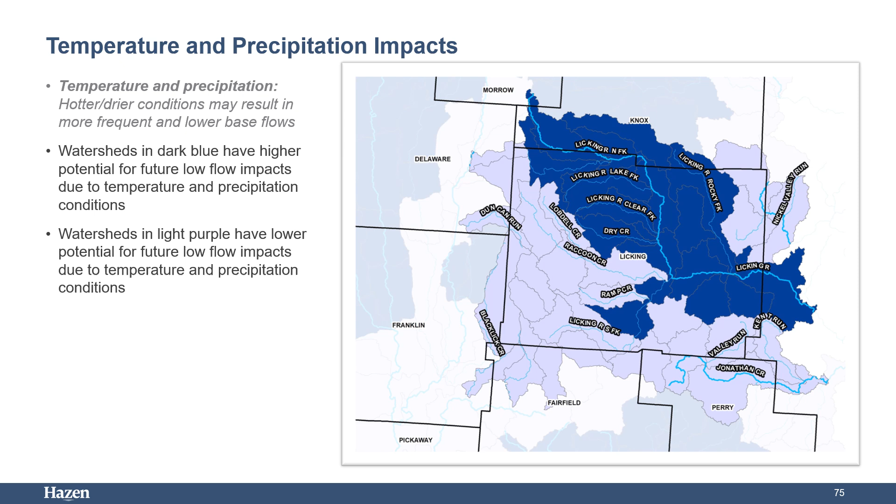The Central Ohio Regional Water Study dashboard can be utilized to examine individual watershed characteristics and identify watersheds with excellent water quality and high potential for future impacts. Those watersheds can be considered and prioritized for protection, conservation, and restoration activities. Several potential mechanisms are available for water quality protection.

With potential water quality impacts identified, considering water quality protection is the next step. Water quality protection is a critical part of any water resource plan. It is important to understand that streams are constantly changing due to a number of factors, including vegetative communities, adjacent land uses, and changing temperature and precipitation. The magnitude of change over the next few decades will vary across the region and is subject to several variables.

Current development plans indicate that development pressure is being increased in areas that are rapidly developed. Proper protections should be in place prior to development and significant land use changes in order to protect local water quality while supporting economic development. Proactive watershed engagement may reduce or eliminate negative impacts of development on water quality. 4 categories of solutions should be considered, including policy, partnerships, data, and funding that could be used to help offset or mitigate any potential future water quality impacts.

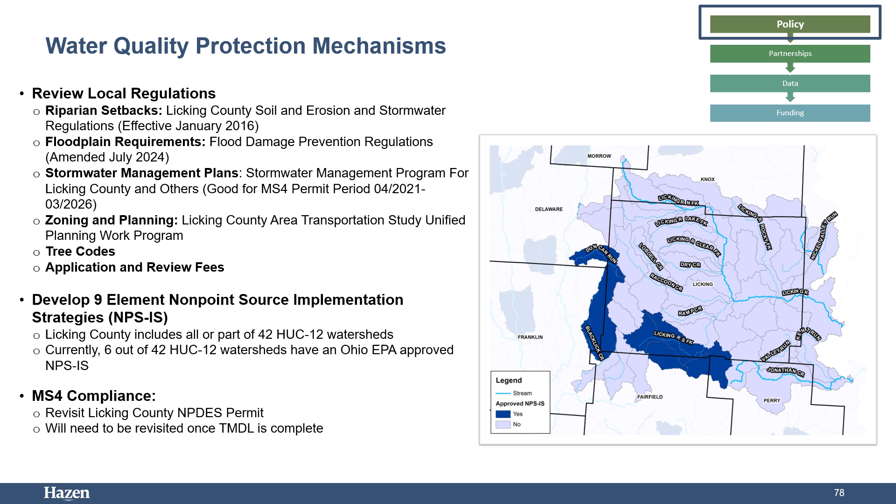Educate communities on grant funding and other mechanisms available to support compliance with local water quality initiatives. By integrating data collection efforts from NPSIS plans into MS4 compliance activities, municipalities can improve regulatory efficiency, strengthen funding opportunities, and enhance water quality improvements.

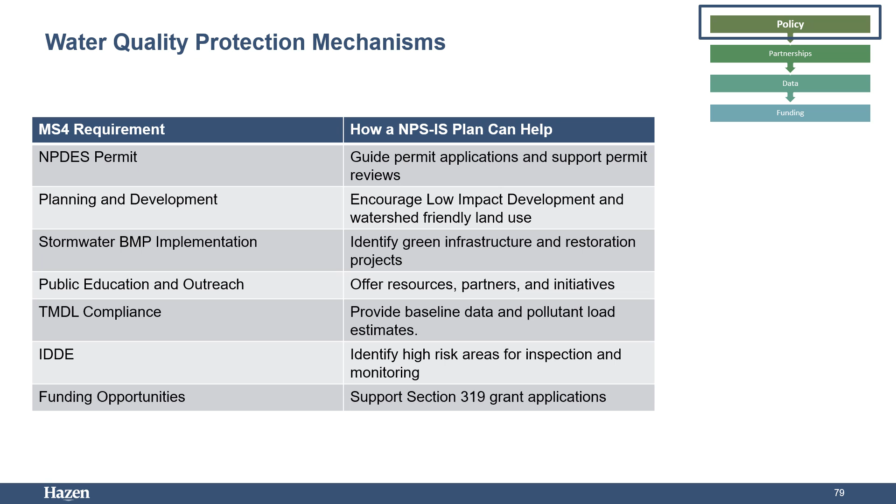Strengthen partnerships between municipalities, watershed organizations, and other local governmental agencies. Communities don't need to work alone. Planning efforts are typically developed with input from state and local agencies, watershed groups and nonprofits, soil and water conservation districts, and universities and research institutions.

By coordinating efforts with these stakeholders, communities can collaborate, get together and coordinate current issues and upcoming plans, meet regularly to discuss trends, projects, and upcoming plans. This can be outlined in stormwater master plans and can be expanded upon to involve additional stakeholders to discuss overall watershed action items. Invite guest speakers to learn about new opportunities.

Representatives from existing partnerships or outside agencies can share success stories, lessons learned, and upcoming opportunities for projects and funding. Collaborate data collection and permit review responsibilities. Ensure responsibilities are delegated appropriately and that all partners have the resources they need to carry out said responsibilities.

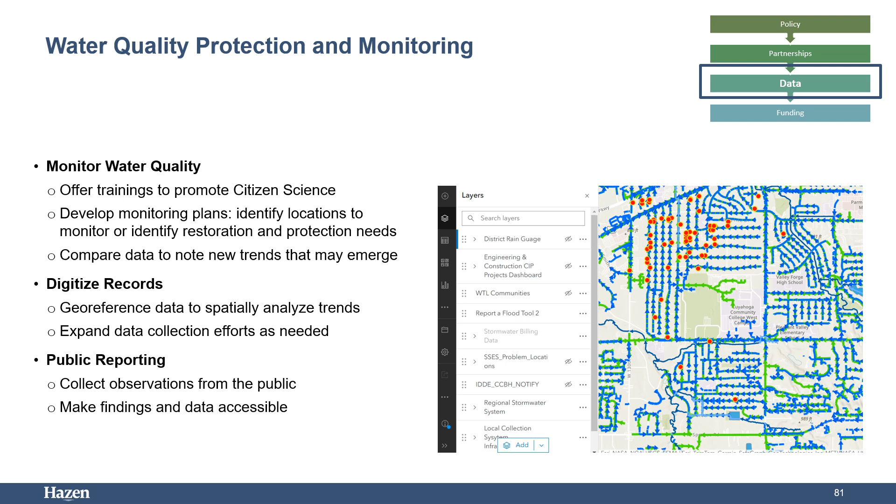Department of Health IDDE sampling locations and results are also available. USGS stream gauges are linked, as well as ODOT bridge inspection data. Planning studies are identified that include reports and recommendations for the problem areas where available.

Prioritize infrastructure upgrades. Secure funding for critical infrastructure such as stormwater management systems, wastewater treatment plant upgrades, and failing septic system replacements to support growing populations.

Focus on areas identified as current or near-term gaps. Consider future scenarios to make conservative planning efforts. Assess regional optimization of services as early as possible.

Incentivize sustainable practices. Establish funding programs to encourage developers to adopt green infrastructure and other low-impact development techniques that minimize the environmental impact of new construction. Examples of these types include bioretention, pervious pavement, extended detention, and other best management practices.

Encourage redevelopment over new development where possible. Proactively identify areas that are suitable for development.

Leverage grant programs. NRAC Clean Ohio Green Space funding is available for preserving green space or riparian areas, and this funding may be used for property acquisition.

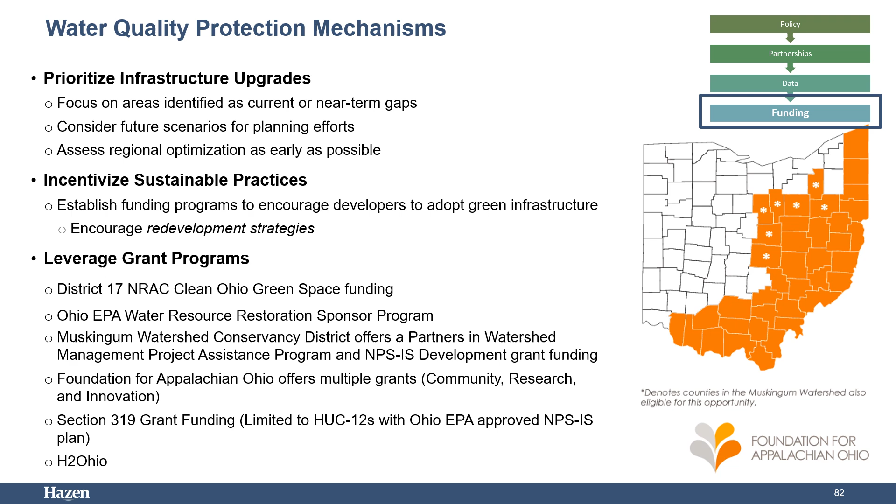H2 Ohio provides funding through H2 Ohio Rivers and H2 Ohio Wetlands. The Rivers program has several grant funding opportunities. Those that are applicable are listed, as well as the coordinating state agency.

Agricultural Incentive Program. In 2024, Governor DeWine announced a statewide expansion of H2 Ohio producer initiatives, making the initiative available for the first time to producers who farm outside of the western Lake Erie Basin. For the first round of statewide enrollment, ODA offered enough funding and resources to enroll a new 500,000 acres outside of the western Lake Erie Basin. More than 525 producers in 51 additional counties enrolled in 2024. The program incentivizes farmers to implement science-based, proven best management practices to prevent nutrient runoff and improve water quality.

ODA works closely with county soil water conservation districts to administer participant contracts, provide technical assistance, and support producers.

The U.S. Department of Agriculture and the state of Ohio are partners in implementing a voluntary Conservation Reserve Enhancement Program, CREP program, to enroll up to 67,000 acres of agricultural land in the Lake Erie watershed and up to 70,000 acres of agricultural land in the Scioto River watersheds within the state of Ohio. Participants receive financial incentives from the USDA to voluntarily enroll environmentally sensitive cropland or pasture land in contracts for a period of 15 years. In return for annual rental payments averaging approximately $150 per acre, participants may convert the land to native grasses, trees, and other conservation vegetation.